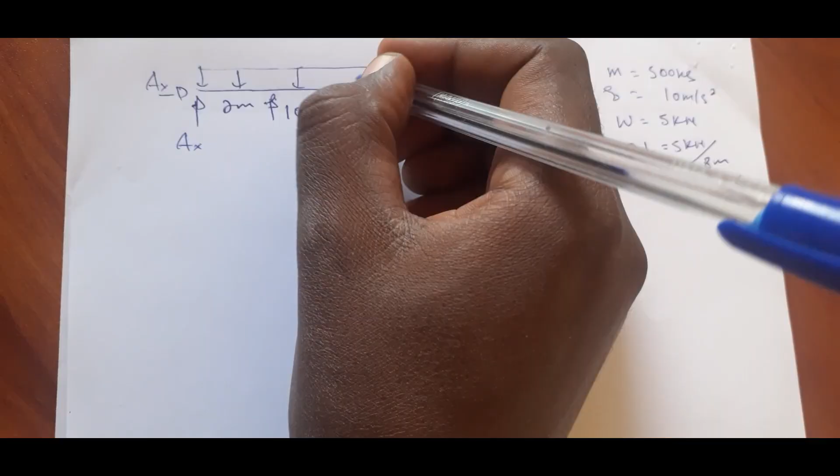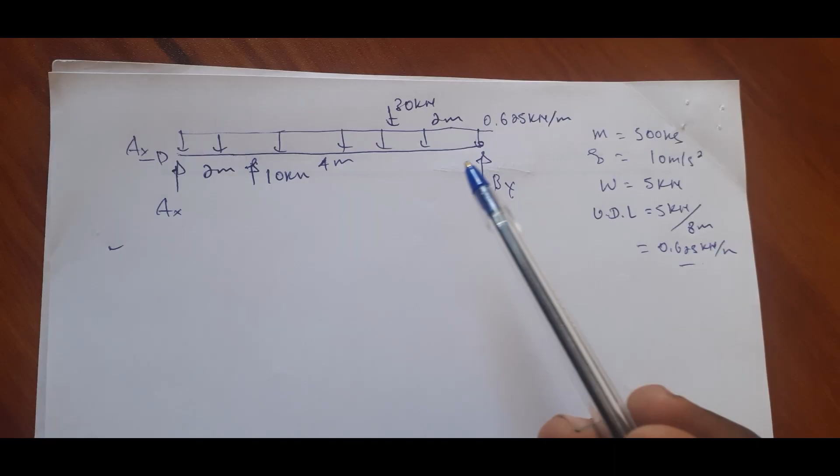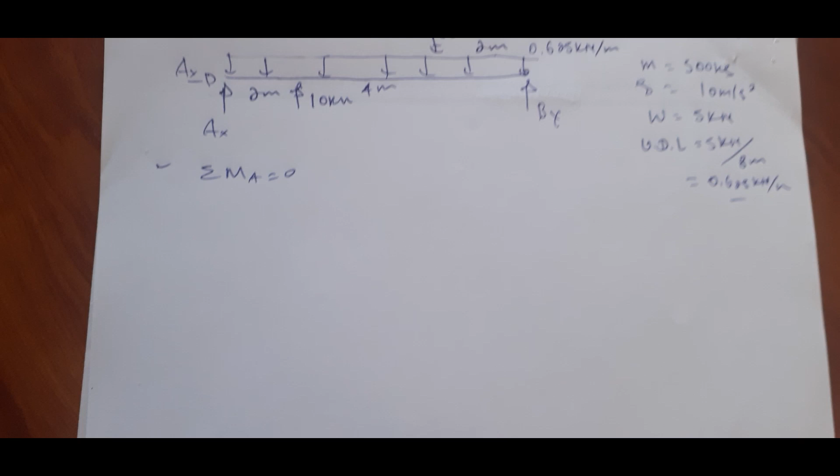The next step is to determine the reactions. Taking summation of moment at point A equals 0, with counterclockwise positive: 0 equals By times 8 meters plus 30 kilonewton times perpendicular distance 6 meters minus 10 times 2.

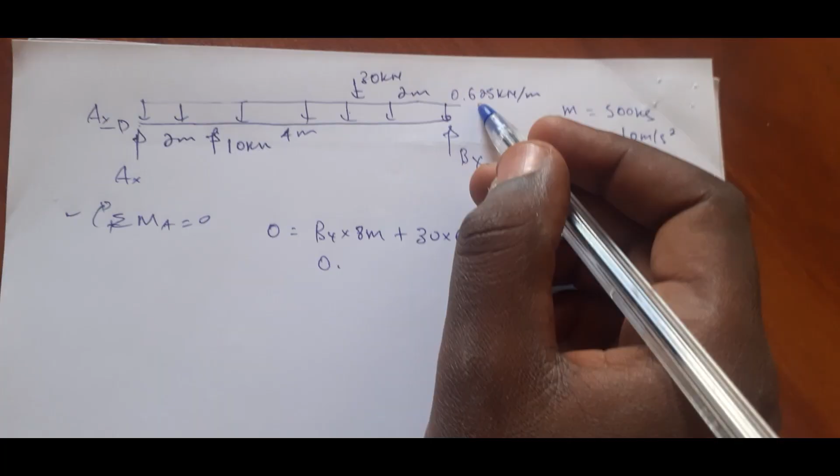Minus the distributed load 0.625 kilonewton per meter times total distance 8 meters times perpendicular distance 4 meters. Then you get By.

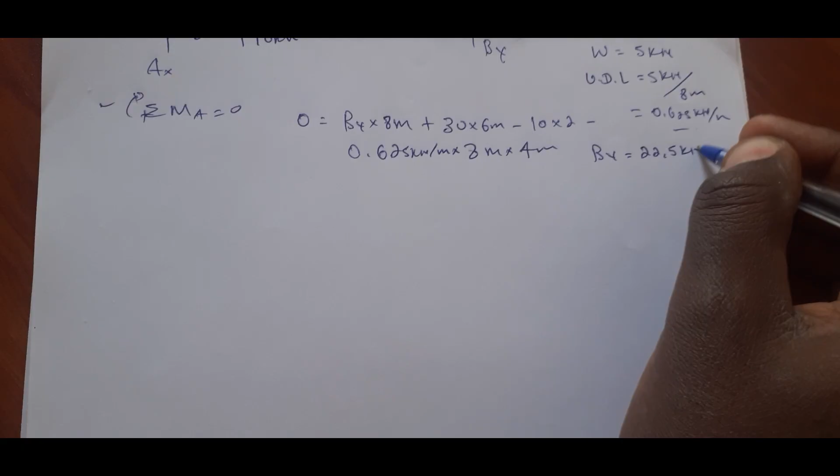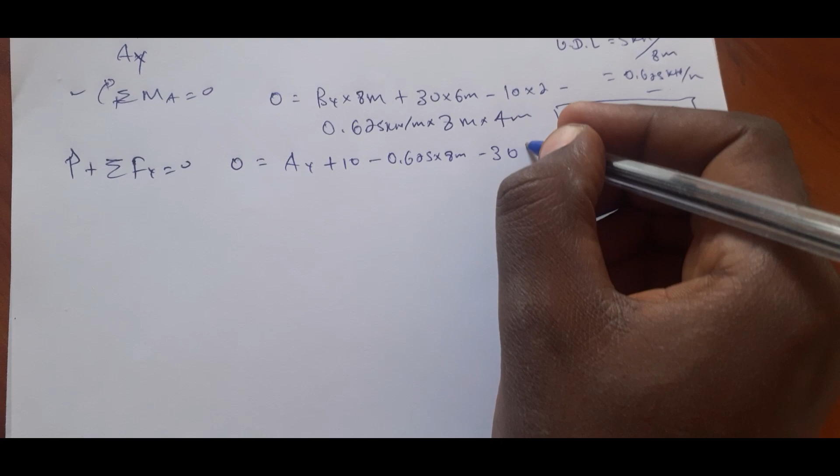You get By equals 22.5 kilonewton. Taking summation of force in y equals 0, upward positive: 0 equals Ay plus 10 minus 0.625 times 8 meters minus 30 plus By 22.5. Therefore Ay equals 2.5 kilonewton.

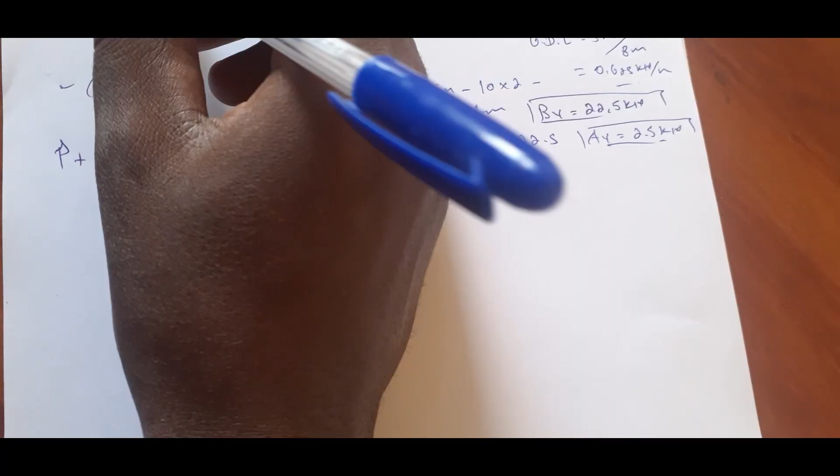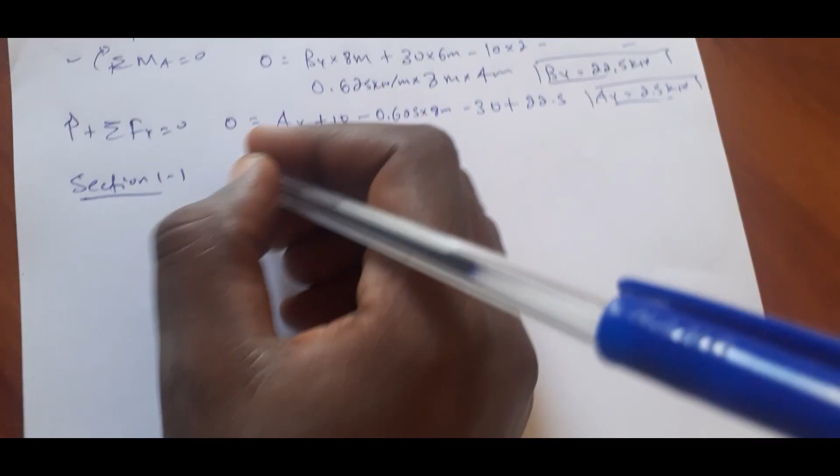Next step is by section: here section 1, section 2, then section 3. Section 1: 0 less than or equal to x less than or equal to 2.

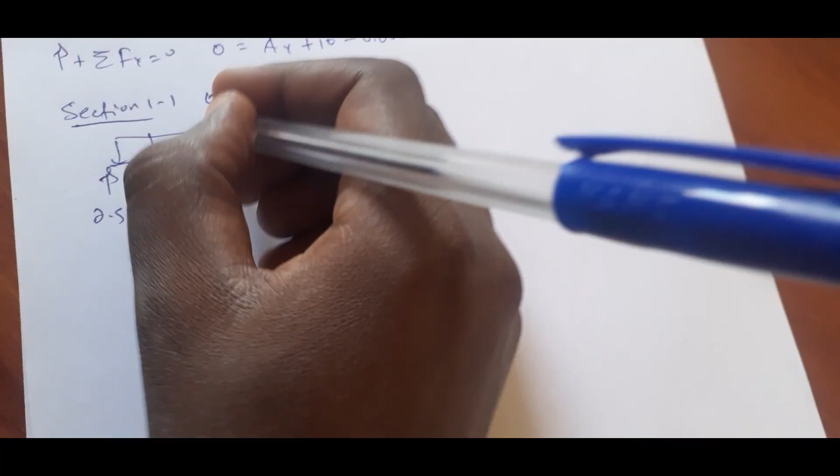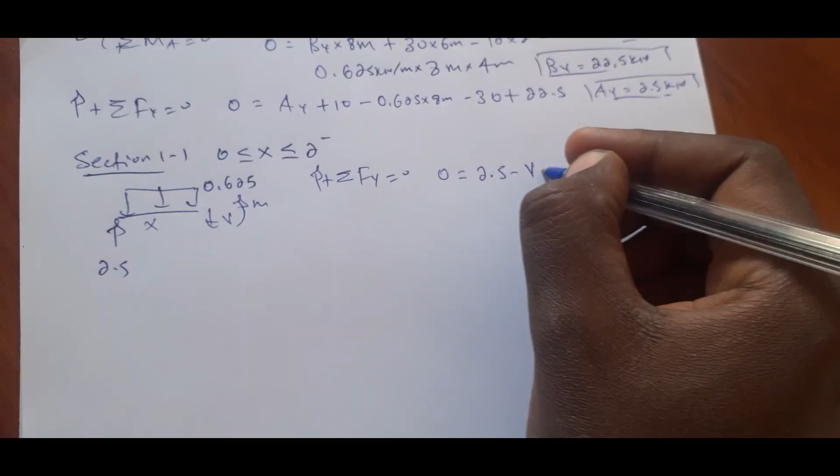We have Ay equals 2.5, and here distributed load 0.625, over distance x, giving us shear and moment. Taking summation of force in y equals 0, upward positive: 0 equals 2.5 minus shear minus 0.625 times x.

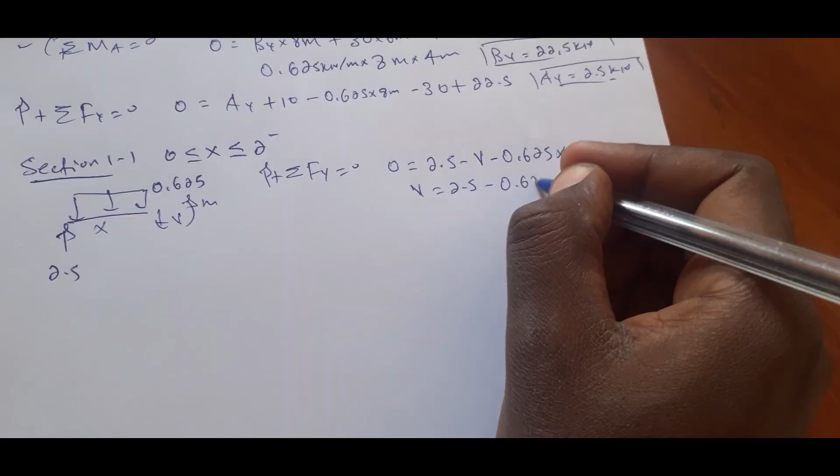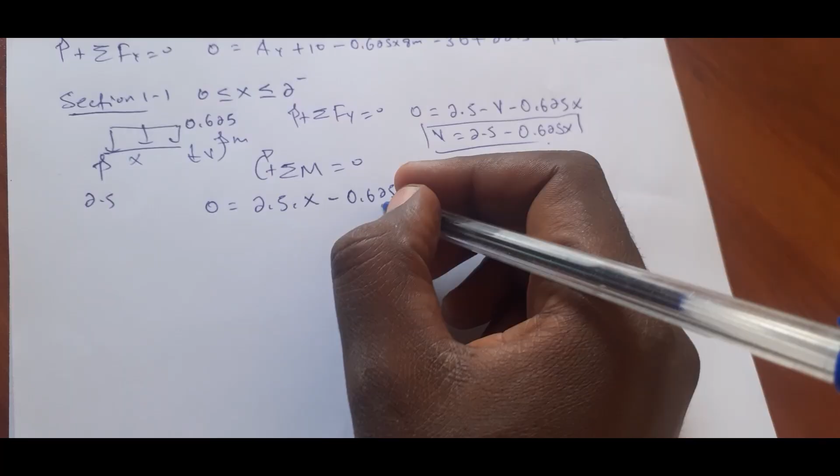So shear equals 2.5 minus 0.625x. Then taking summation of moment at the section equals 0, clockwise positive: 0 equals 2.5 times x minus 0.625 times x times perpendicular distance divided by 2, then squared, minus m.

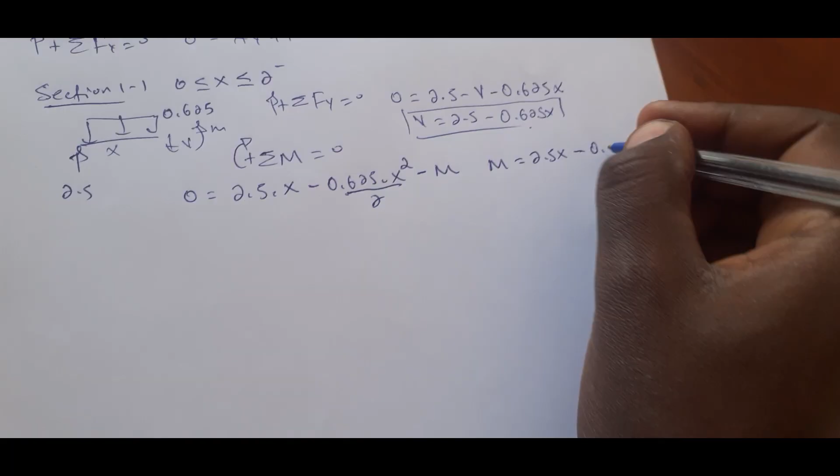So moment m equals 2.5x minus 0.3125x squared.

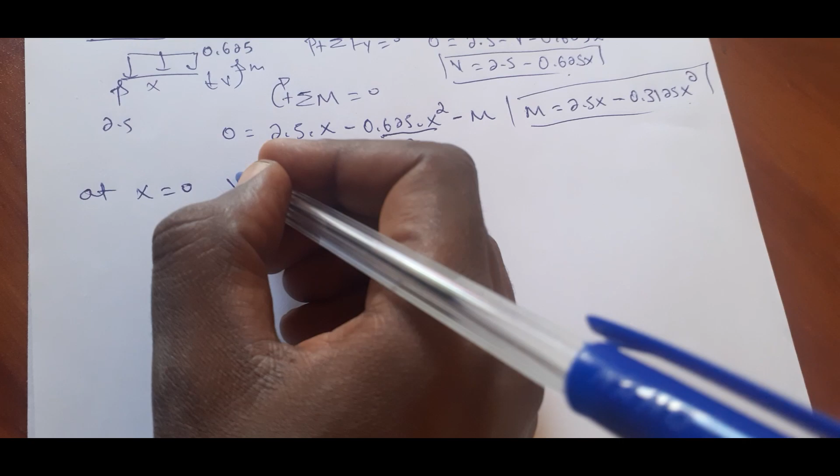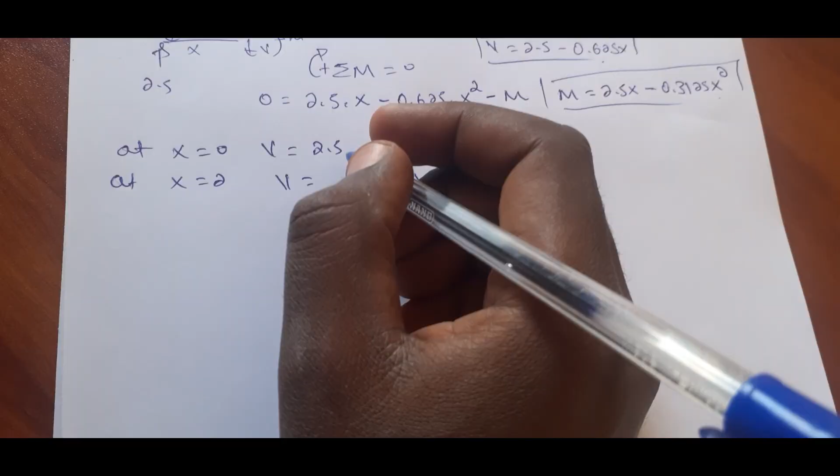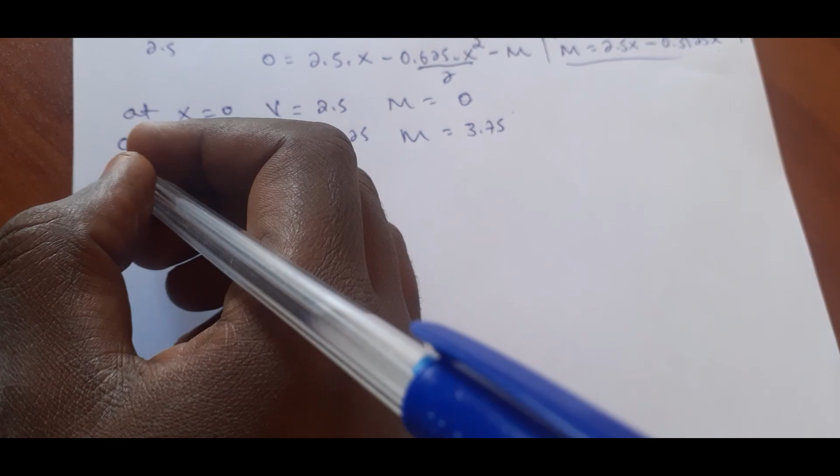At x equals 0, what is the shear? What is the moment? At x equals 2, what are shear and moment? When you put x equals 0, shear is 2.5 and moment is 0. When x is 2, shear is 1.25 and moment is 3.75.

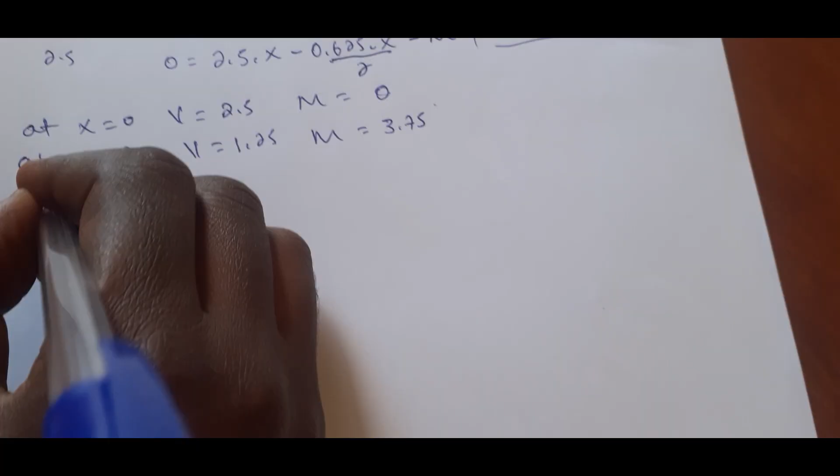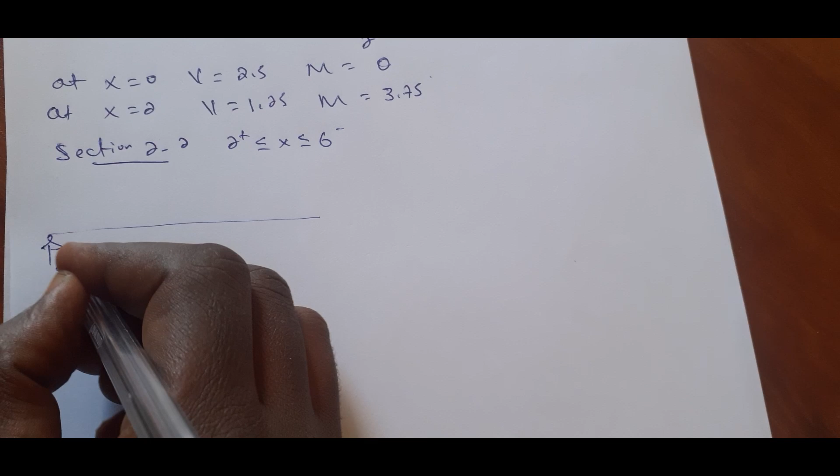Then we go to section 2, from 2 up to 6. Here we have Ay equals 2.5 and a uniformly distributed load.

Here shear and moment together with a 10 kilonewton force at 2 meters apart, distance x, and the distributed load is 0.625. Then we determine shear and m.

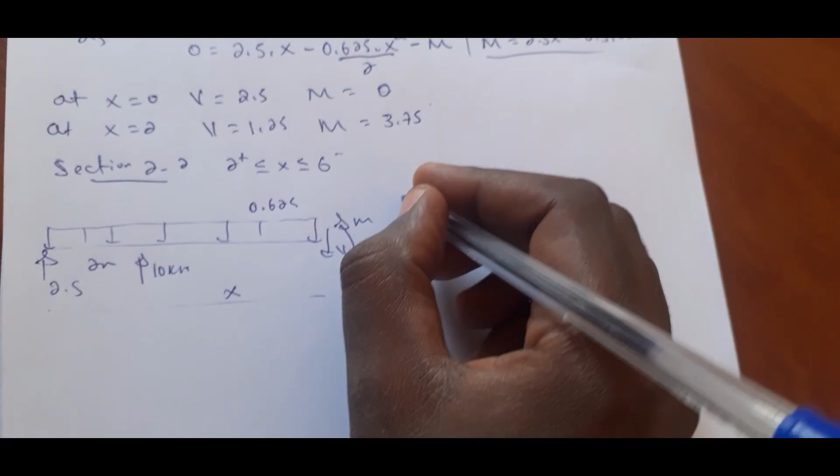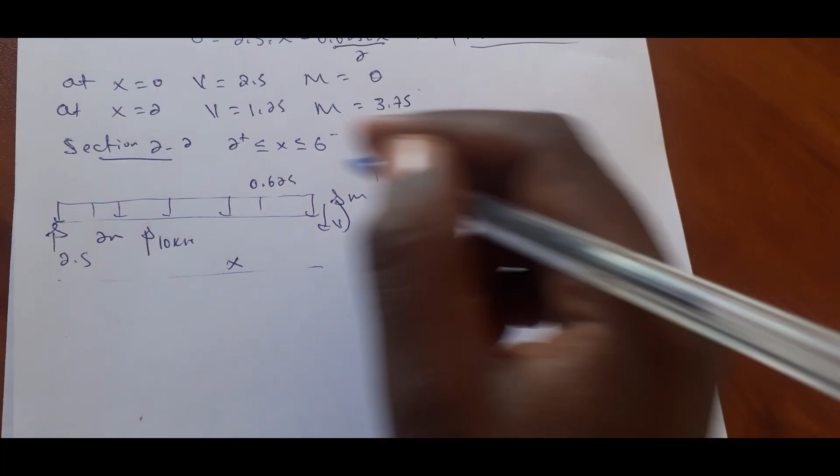Same approach: summation of force in y equals 0, upward positive: 0 equals 2.5 plus 10 minus shear minus 0.625 times x. So shear equals 12.5 minus 0.625x.

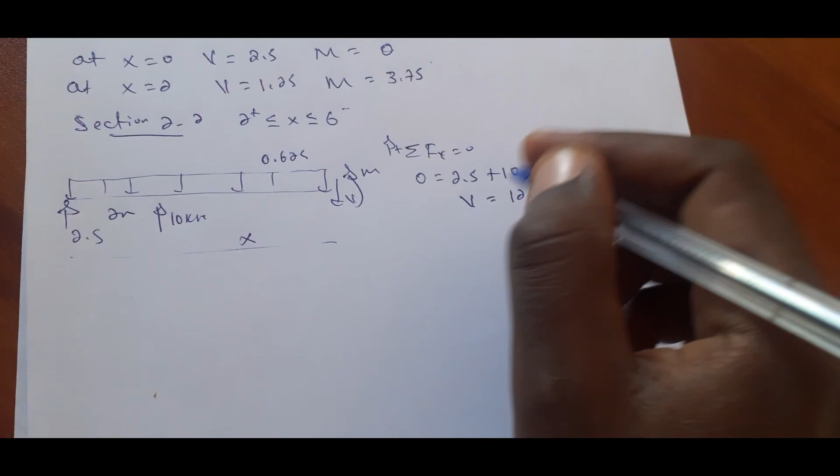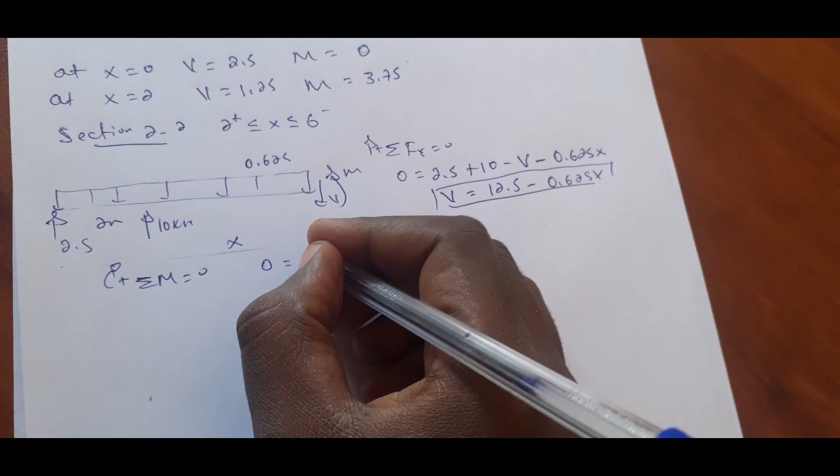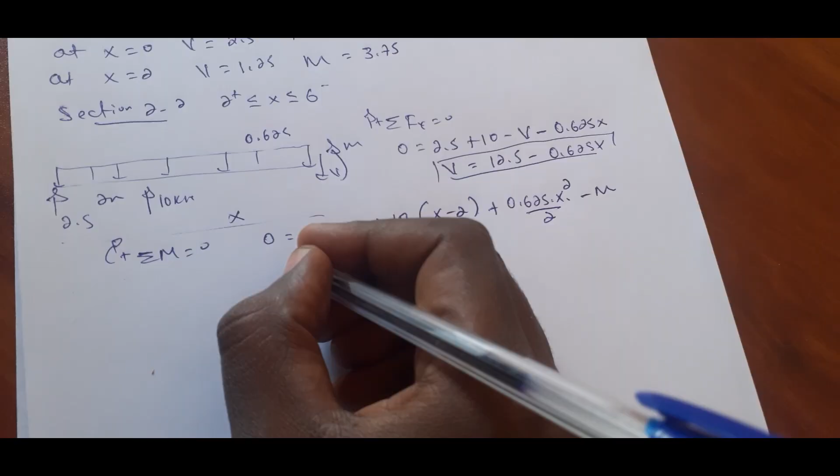For moment: summation of moment equals 0, clockwise positive: 0 equals 2.5 times x plus 10 times (x minus 2 meters) plus 0.625 times x squared over 2 minus m.

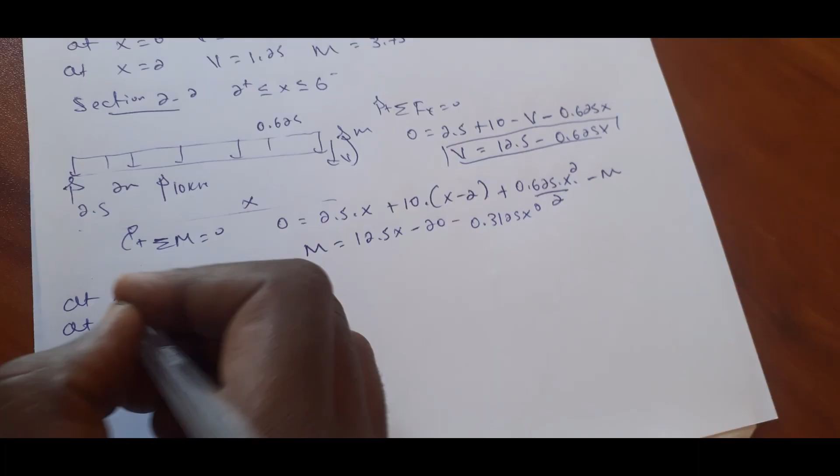At x equals 2 and at x equals 6, you get the shear and moment values. At x equals 2, shear is 11.25 and moment is 3.75. At x equals 6, shear is 8.75 and moment is 43.75.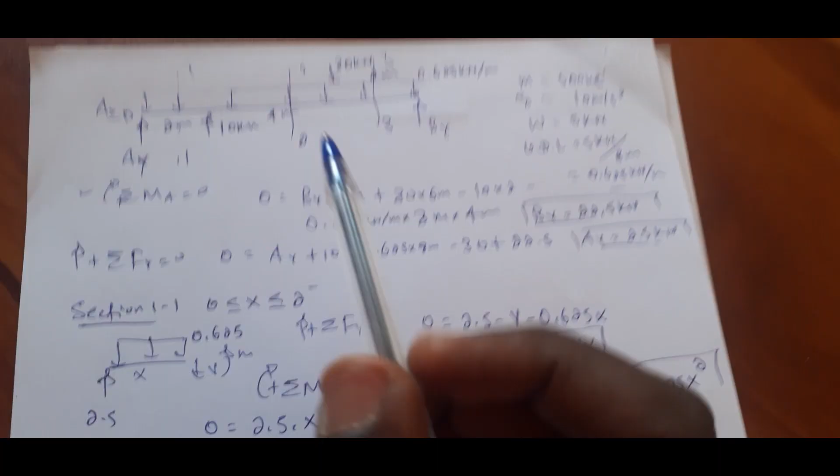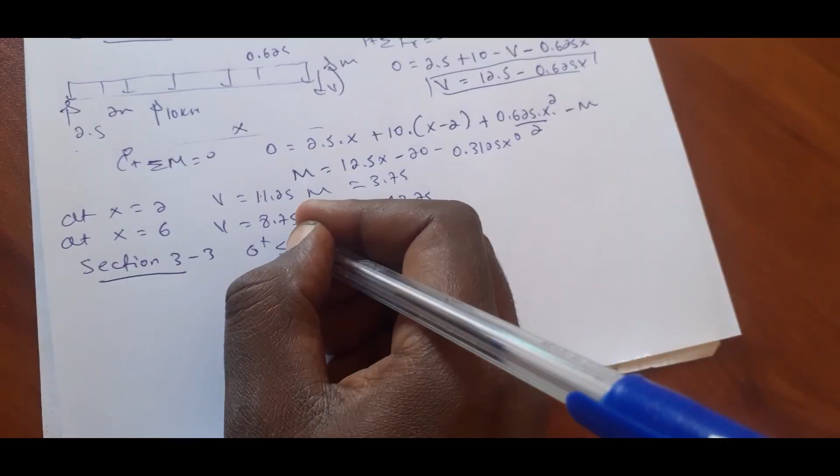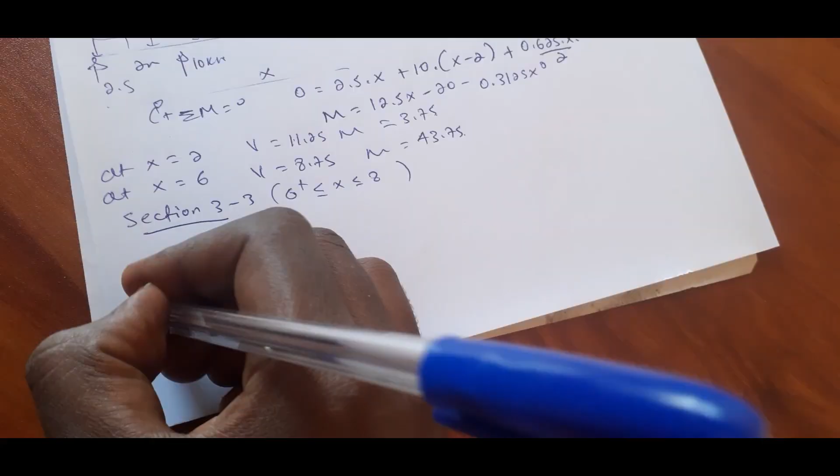We cut it from the far side. Here By is 22.5, and we have shear and moment with a uniformly distributed load of 0.625. Taking summation of force in y equals 0.

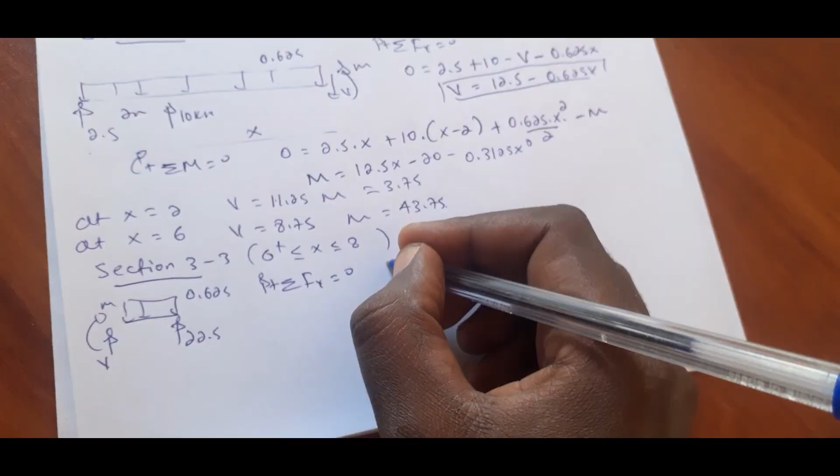Upward positive: 0 equals shear plus 22.5 minus 0.625 times (8 minus x) distance times... from this you get shear.

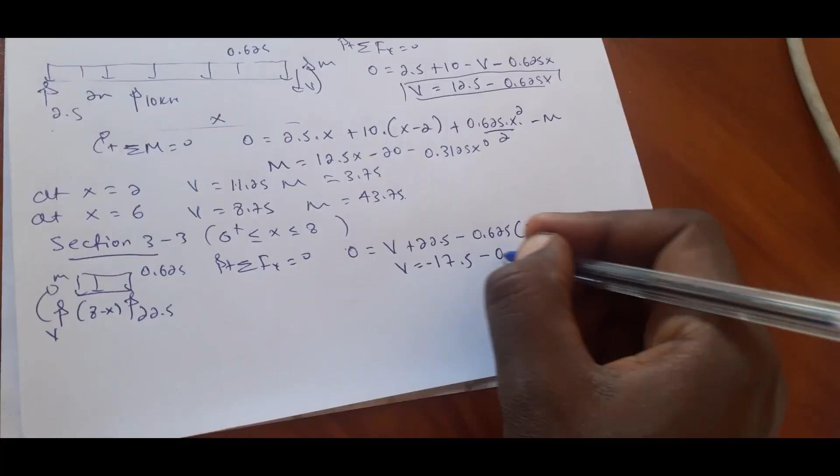You get shear equals minus 17.5 minus 0.625x. Now we find moment: summation of moment equals 0.

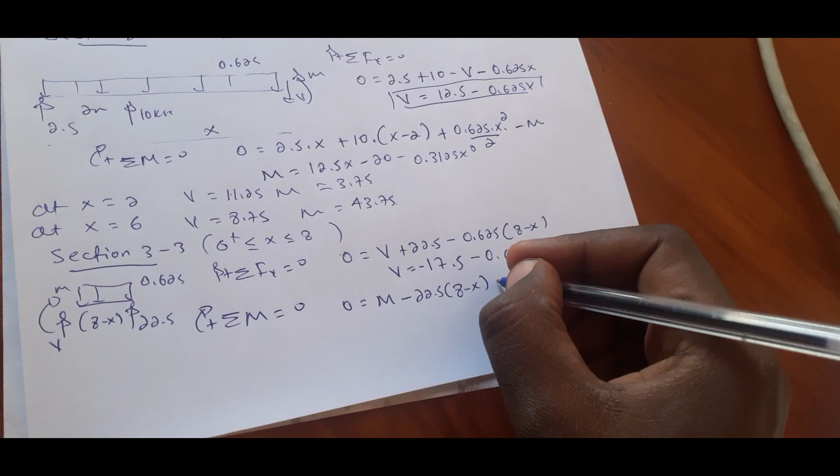Clockwise positive: 0 equals m minus 22.5 times perpendicular distance plus 0.625 times (8 minus x) times perpendicular distance, all divided by 2.

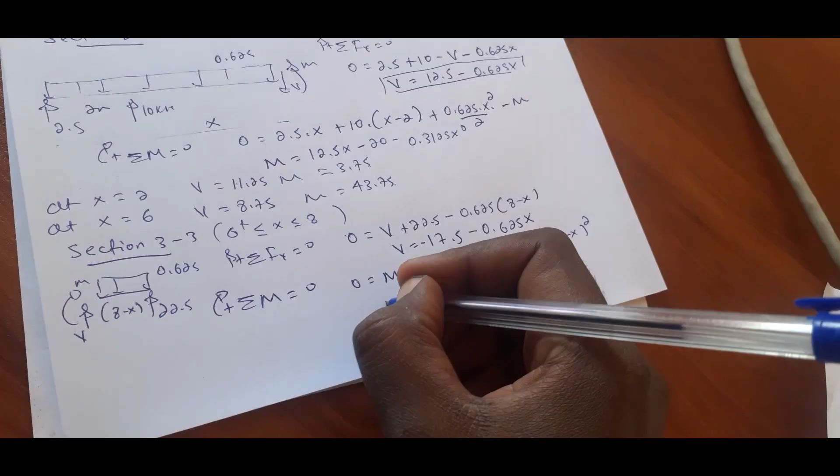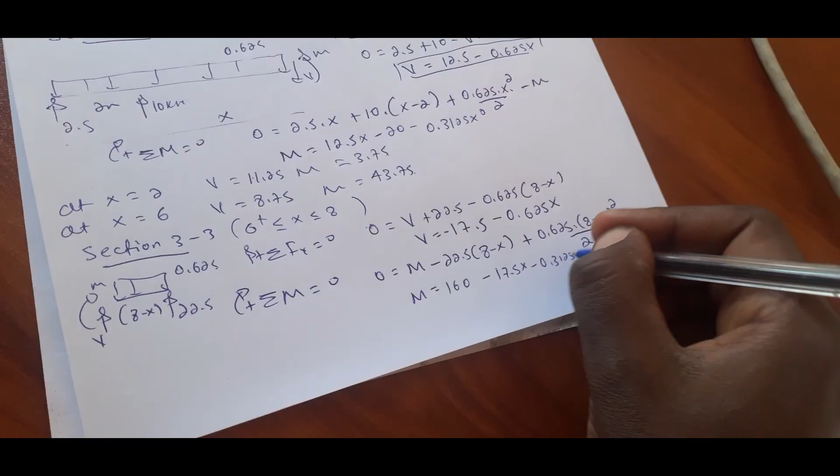Then m equals 160 minus 17.5x minus 0.3125x squared.

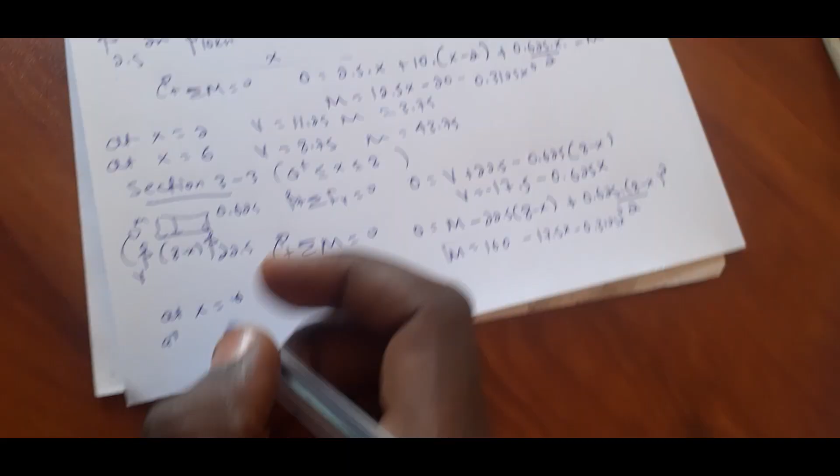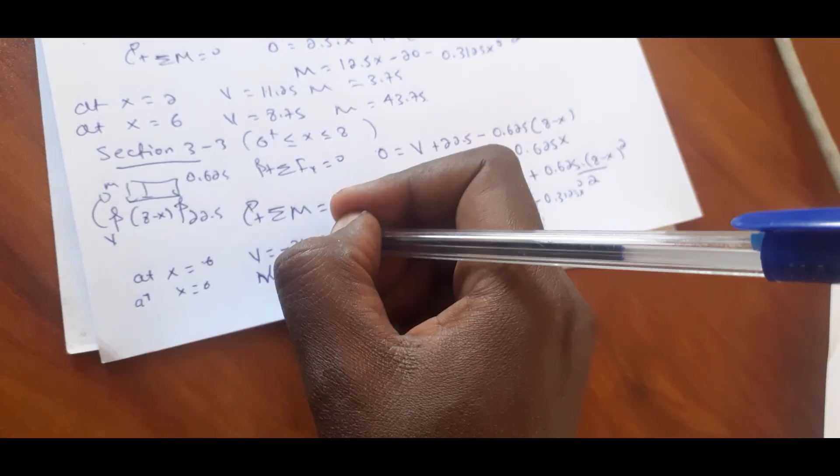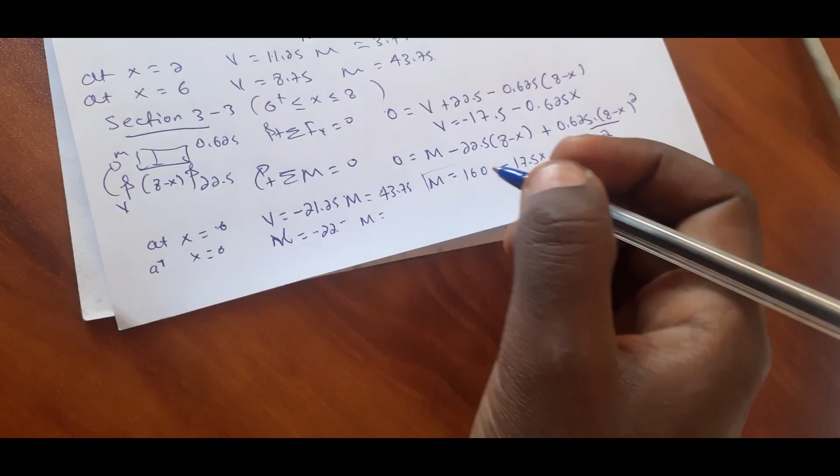At x equals 6 and at x equals 8, what are the shear and moment? At x equals 6, shear is minus 21.25 and moment is 43.75. At x equals 8, shear is minus 22.5 and moment is 0.

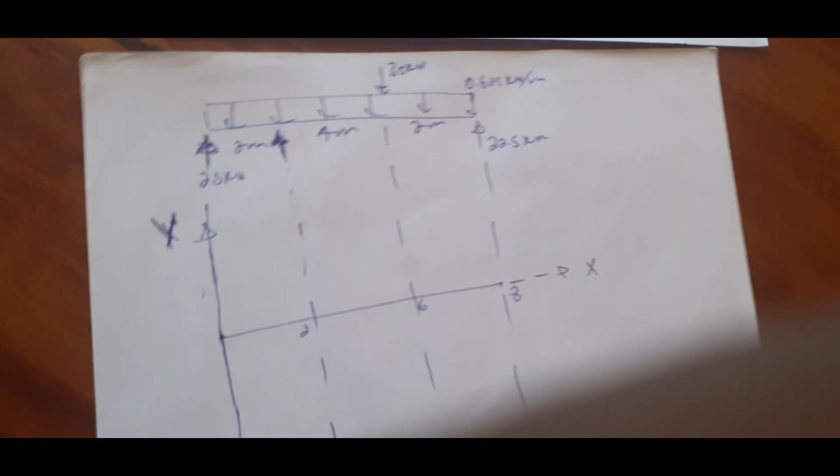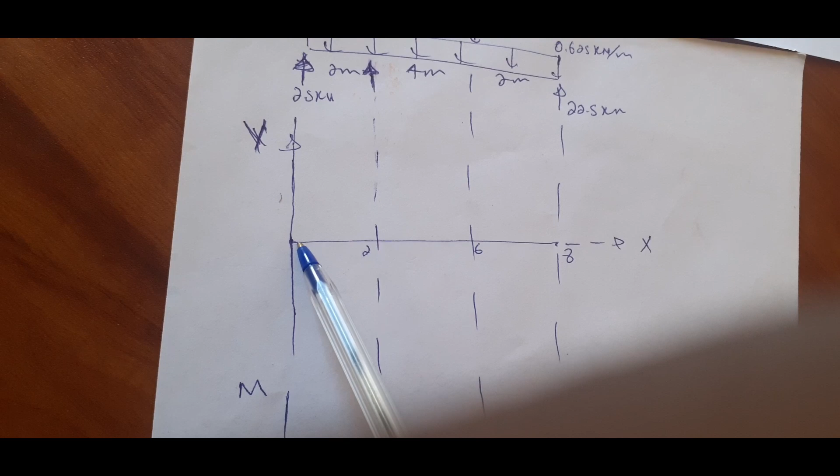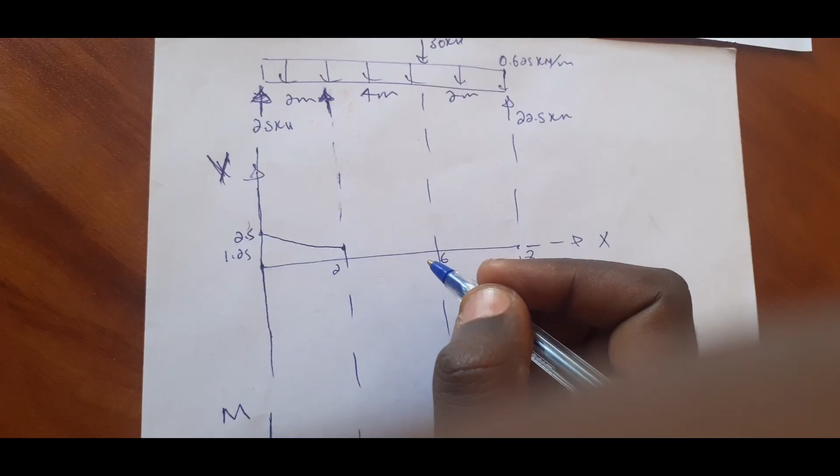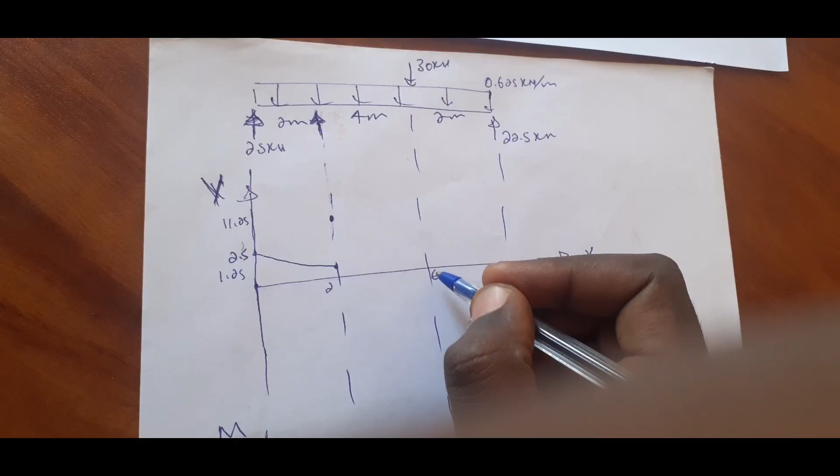At x equals 2, this is 1.25. This result is linear, therefore a straight line. For section 2, shear at x equals 2 was 11.25, then at x equals 6, our shear is 8.75. This is also linear.

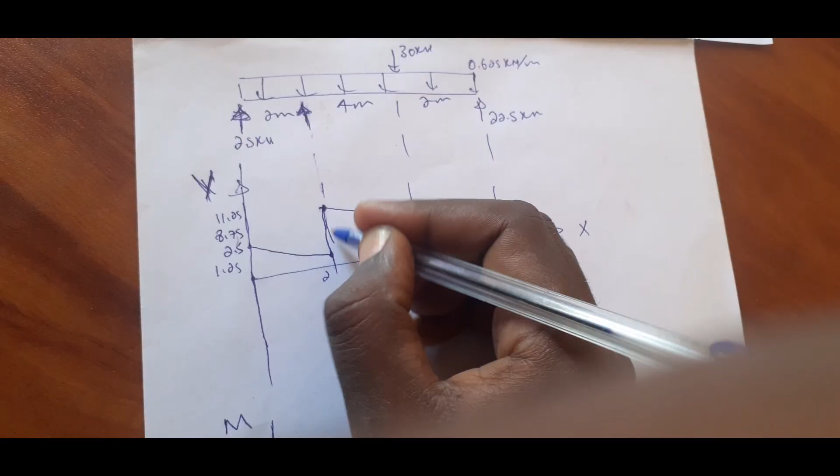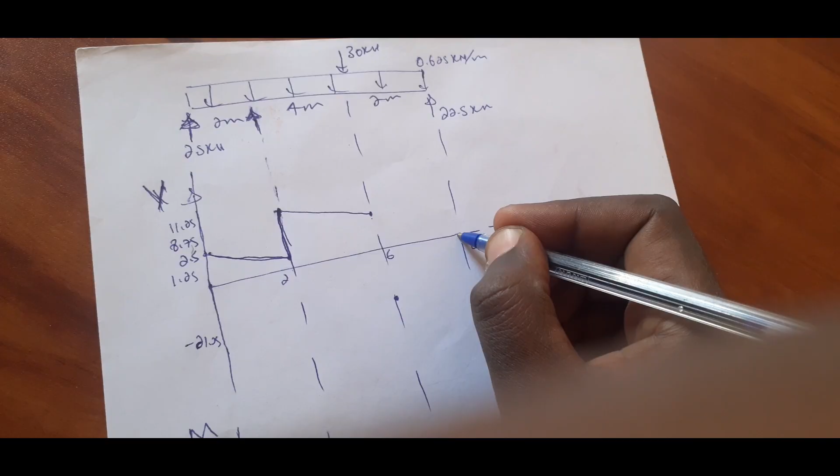At x equals 6, in section 3, our shear was -21.25. Then at x equals 8, our shear becomes -22.5 (or -22).

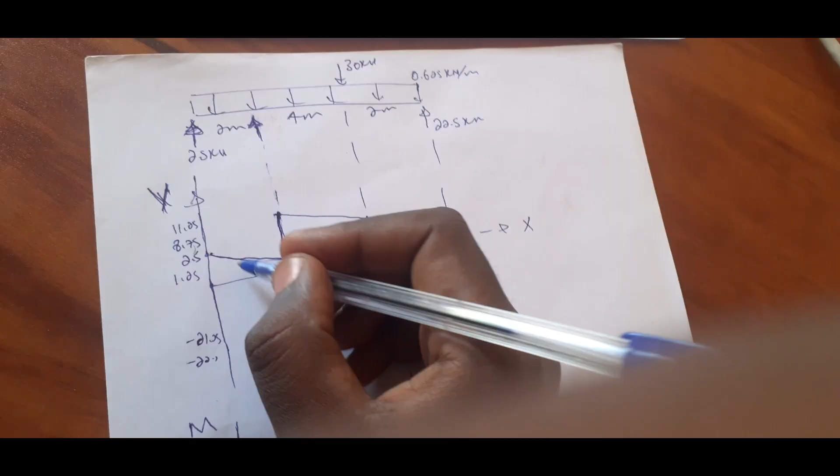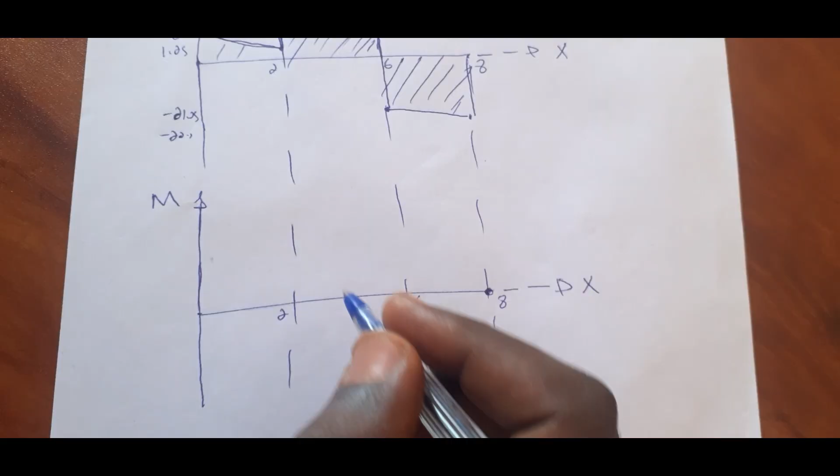Next we draw the bending moment diagram. At x equals 0 in section 1, we already solved it: moment is 0. At x equals 2, moment is 3.75. It is a quadratic equation.

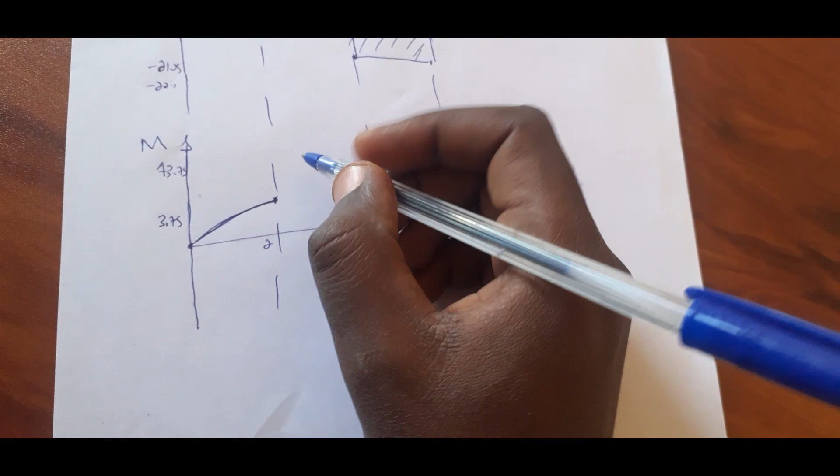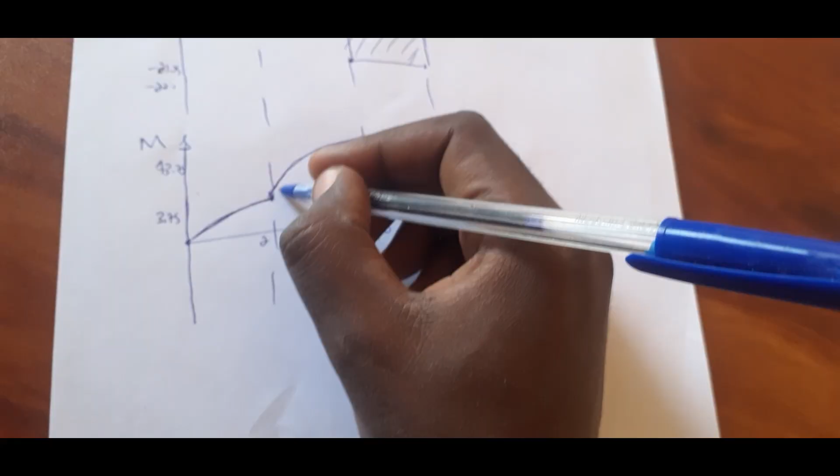It is quadratic again, giving 43.75. Sorry, and the curve looks like this.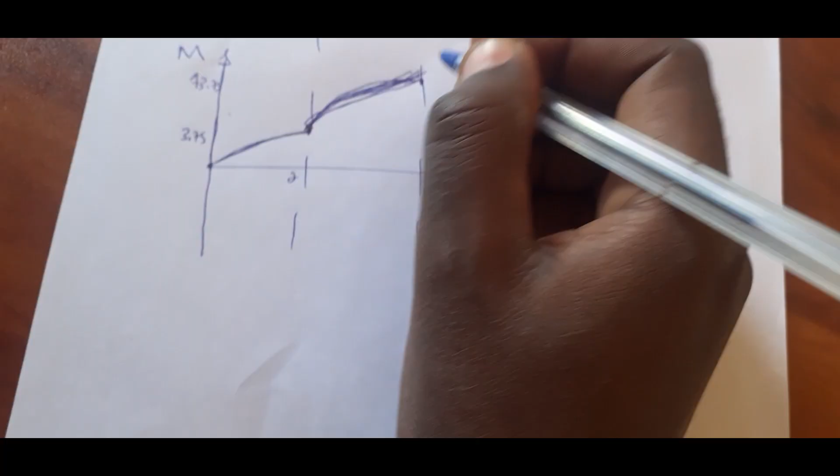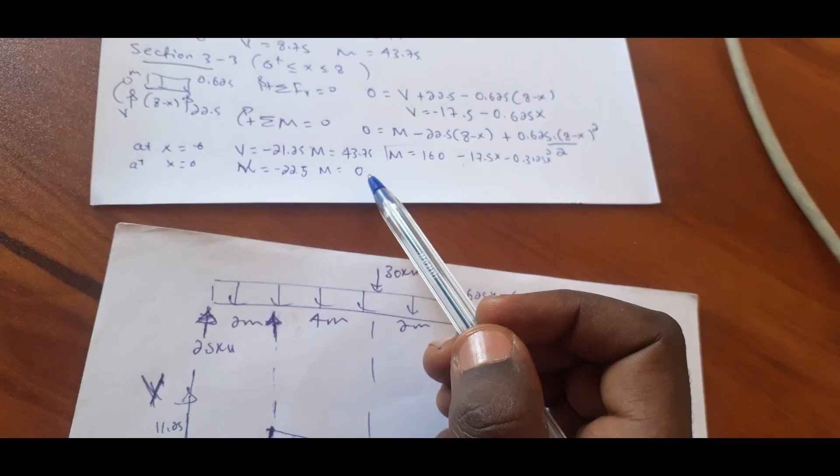So the moment at section 3 is 43.75, changing to 0, which is also a quadratic equation, changing over an interval distance of 2. Therefore the curve looks like this.

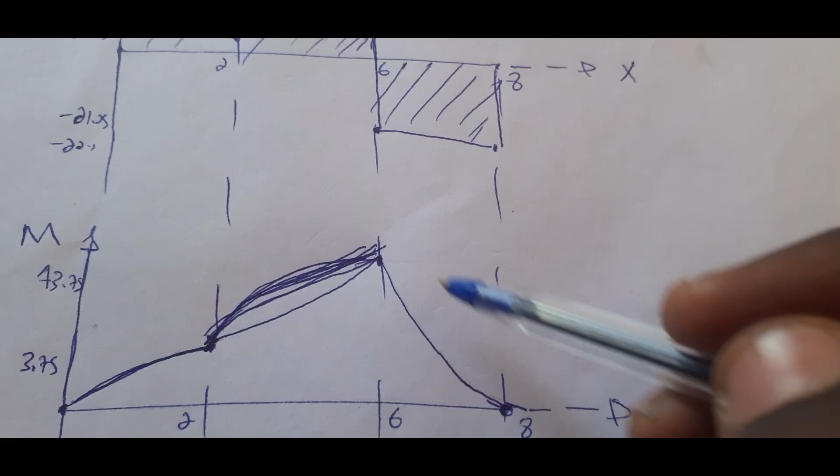This one was the same as before, increasing the same way, with this curve. Therefore this is the bending moment diagram.